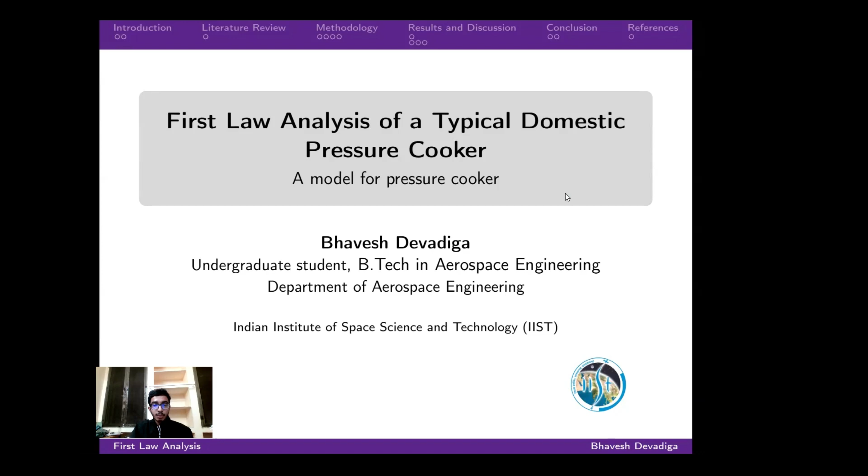The presentation follows this structure. I'll begin with a brief introduction, then move to the literature review, methodology, results and discussions, and finally the conclusion.

A pressure cooker is a closed vessel that traps steam. As the trapped steam increases pressure, it raises the boiling point of the water. This allows faster cooking, reduced energy consumption, and often retains nutrients. The system is ideal to demonstrate the energy of the first law thermodynamics as heat enters and leaves through a mass flow of steam.

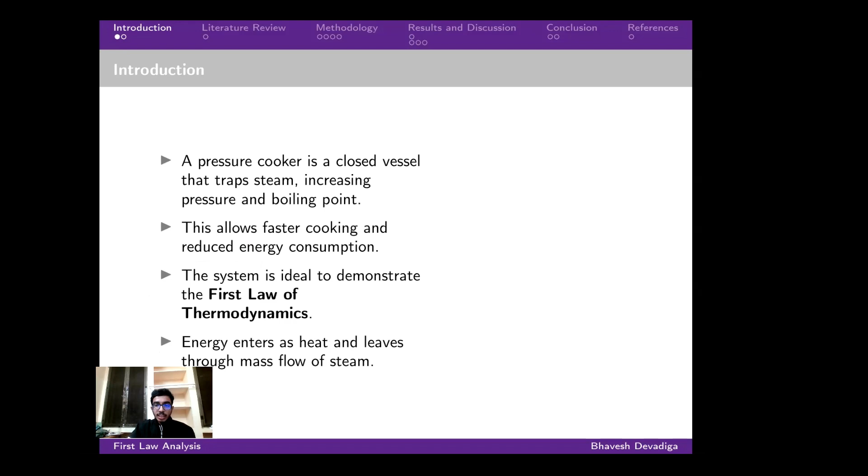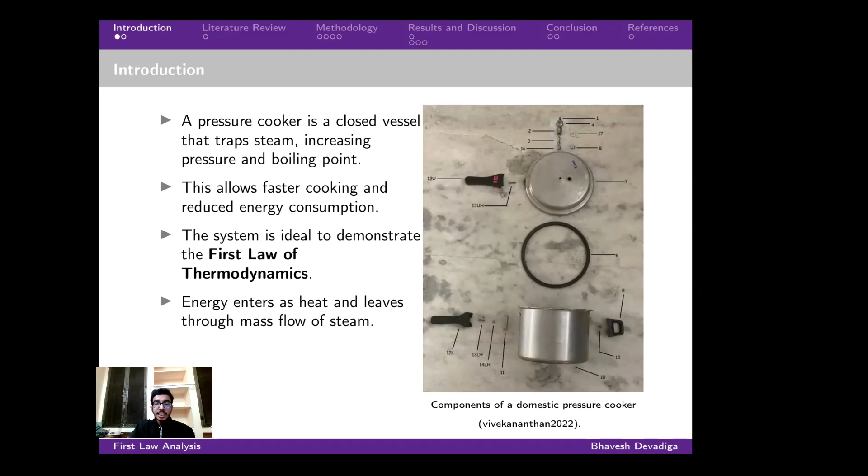The objective is to develop a simple thermodynamic model for the cooker and analyze its behavior using the first law. The study evaluates mass and energy balance, calculates the vented steam and change in internal energy, defines efficiency, and studies how parameters like time, volume, pressure, and temperature affect performance estimate.

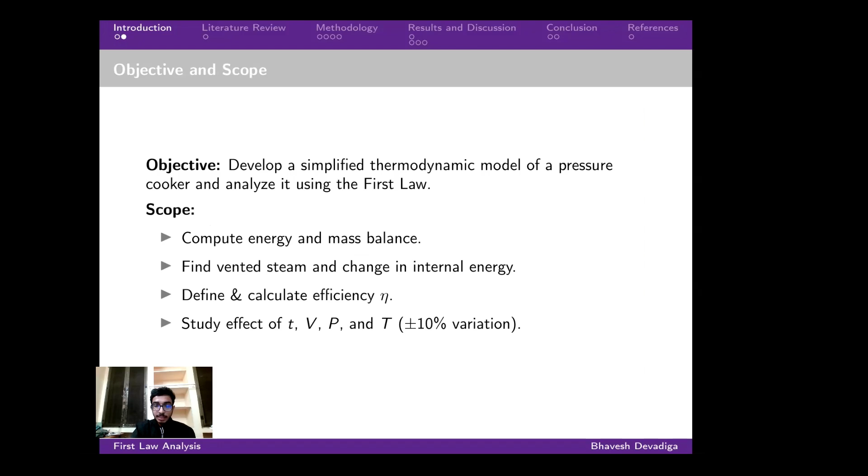Several studies have investigated various aspects of a pressure cooker, such as energy efficiency, heat and mass transfer, energy management, fluid flow, thermal loss, pressure variation, and temperature evolution.

Flick simulated fluid flow and heat transfer in a pressure cooker using three-dimensional computational fluid dynamics to predict gas and temperature evolution, including evaporation and condensation in the presence of non-condensable gases. Some phenomena that were difficult to characterize experimentally were observed in the simulation.

Building on this, Rocca-Poliméni developed a model of heat and mass transfer that predicted the evolution of pressure and gas composition at different temperatures. The study emphasized that condensation was a major part of heat transfer to food and recommended reducing heating power once the desired pressure is reached, as steam escaping instead of condensing on food is a thermal loss. Ayub experimentally tested the automatic non-steam release mechanism by decreasing the heating power as suggested by the previous work.

The study reported that the mechanism combined with ceramic insulation reduced thermal loss. Similarly, Ouedraogo insulated the pressure cooker with kapok wool and conducted a first law energy analysis to find thermal losses. The study showed that insulation reduced energy consumption during cooking.

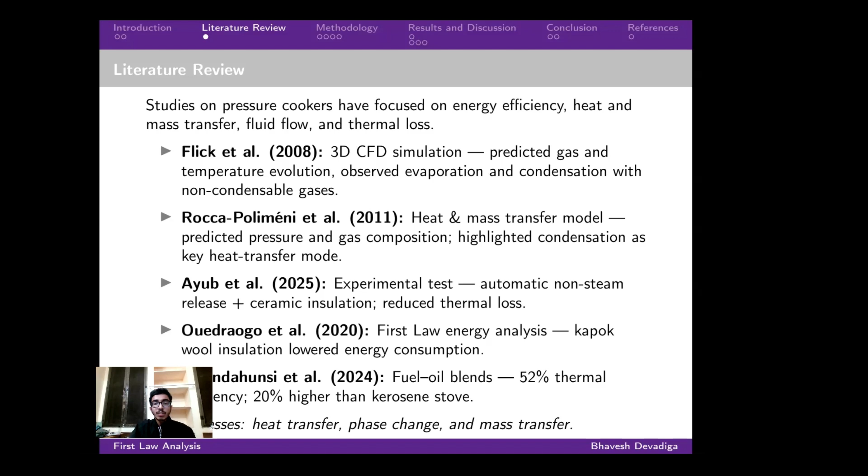These studies indicate that heat transfer, phase change, and mass transfer are key processes in a pressure cooker. The present work applies the first law of thermodynamics to a control volume.

The cooker's interior wall is treated as a control volume. Heat is supplied from an electric heater and some steam escapes through the vent valve. The system is assumed to be rigid, meaning no boundary work. Energy transfer occurs only through heat input and mass leaving as vapor.

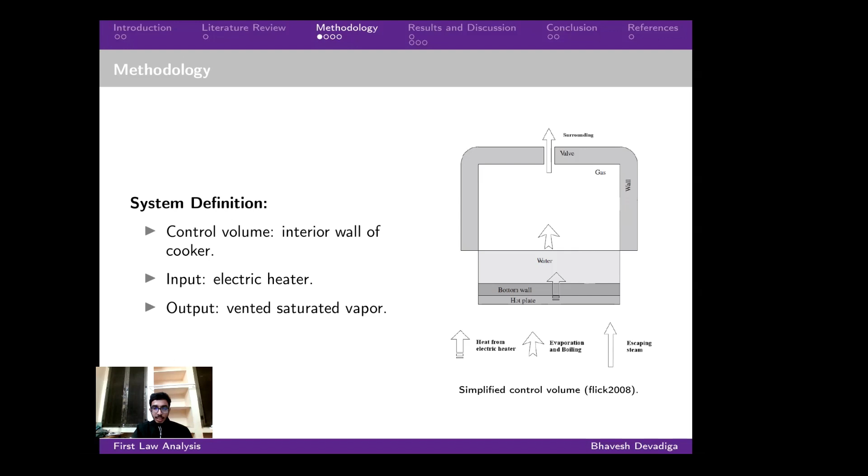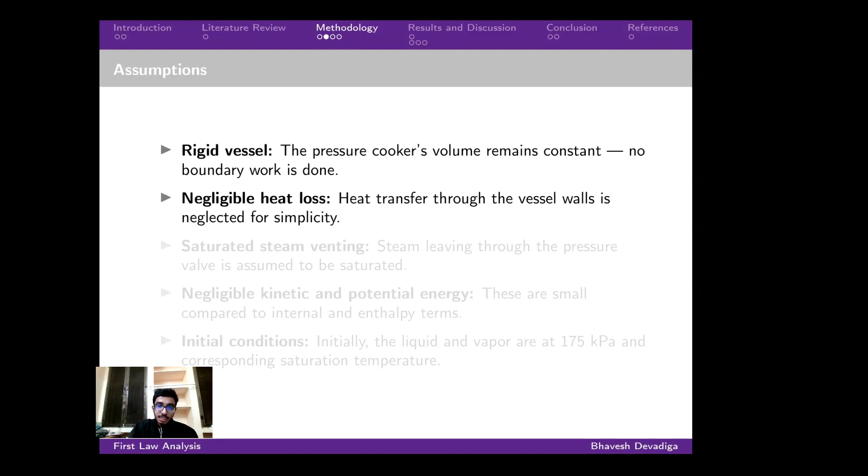The analysis is based on a few simplifying assumptions. The vessel is rigid, hence no boundary work. There is negligible heat loss to the vessel's wall for simplicity. Heat transfer to the vessel wall is neglected. Vented steam is saturated while exiting the vessel. Negligible kinetic and potential energy compared to enthalpy and internal energy.

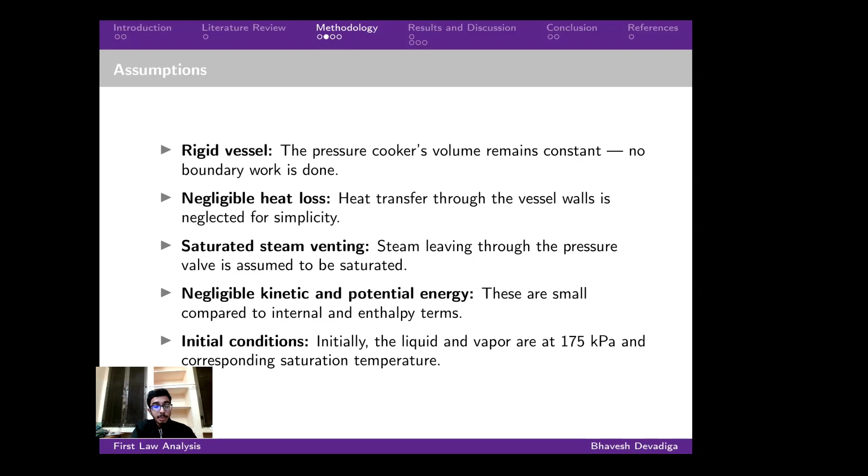Initially, the liquid and vapor are at 175 kilopascals and corresponding saturation temperature. Liquid and vapor occupy equal volume initially. At an operating pressure of 175 kilopascals, and 116 degrees Celsius, the cooker receives 500 watts of heat input.

Property values such as internal energy and enthalpy are taken from Cengel's book, Thermodynamics: An Engineering Approach. Experimentally, pressure, temperature, heat, and mass in the vessel can be measured using a dial gauge, thermocouple, wattmeter, and a weighing scale. The internal energy and enthalpy values can be figured out from the property table once we know the pressure, temperature, and quality.

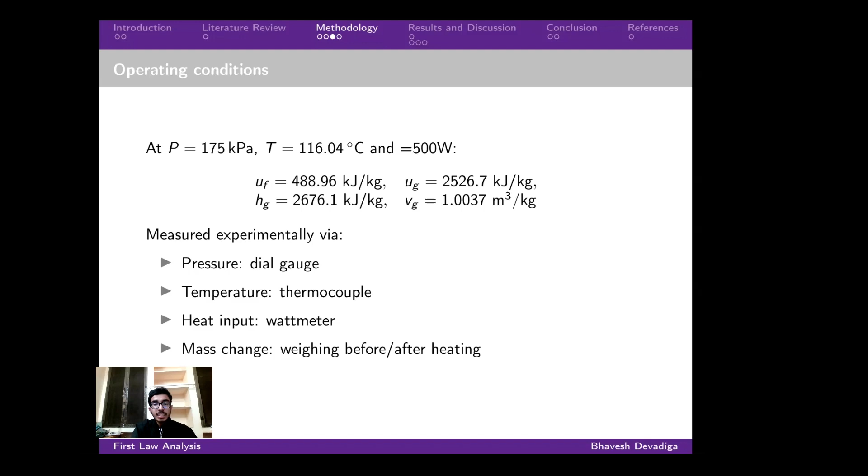The first law of thermodynamics for a control volume is applied as shown. Since there is no shaft work and negligible kinetic and potential energy changes, the equation simplifies to an energy balance between the heat added, the enthalpy of vented steam, and internal energy.

A volume constraint ensures the vessel remains rigid. Now we get the relation between mass and the quality of the mixture. This becomes a linear equation with two variables.

The efficiency is useful energy carried away by steam upon heat input. The efficiency is defined this way because previous studies have shown that most of the heat transfer to the food occurs through condensation. Hence, more steam means more condensation potential.

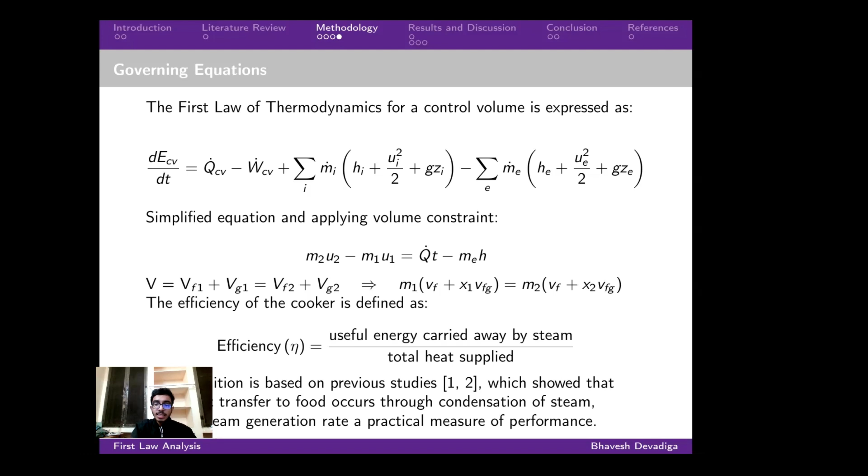Using the governing equations and volume constraints, expressions were obtained for the mixture quality X2, the mass vented ME, and the efficiency eta. As we can see, these relations allow us to calculate how steam quality and mass vary with time and how much heat contributes to vapor generation.

Mass exiting ME is directly proportional to time. One interesting observation is that the efficiency remains constant with time. We can also calculate mass exiting, quality, and efficiency using other parameters like initial volume, operating pressure, saturation temperature, while keeping other parameters constant, which we will see now.

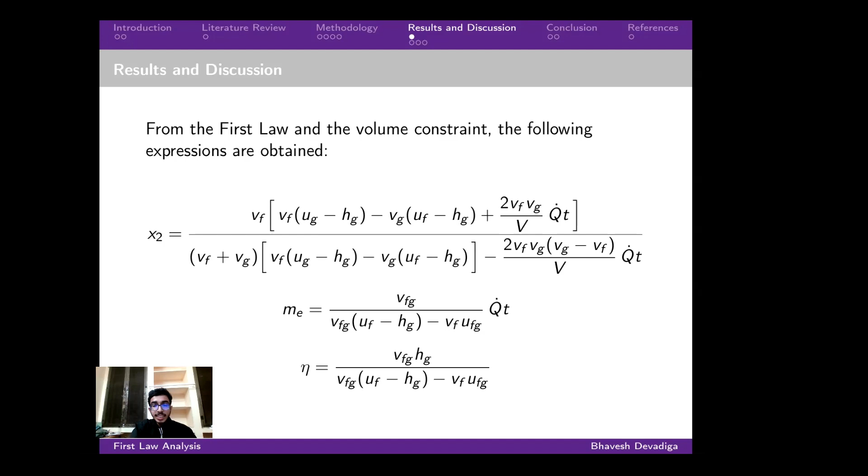The first plot shows that efficiency remains constant with time at about 0.94, meaning almost all of the supplied energy is used for vaporization. This is constant as the heat venting out due to mass as well as total heat input is proportional to time.

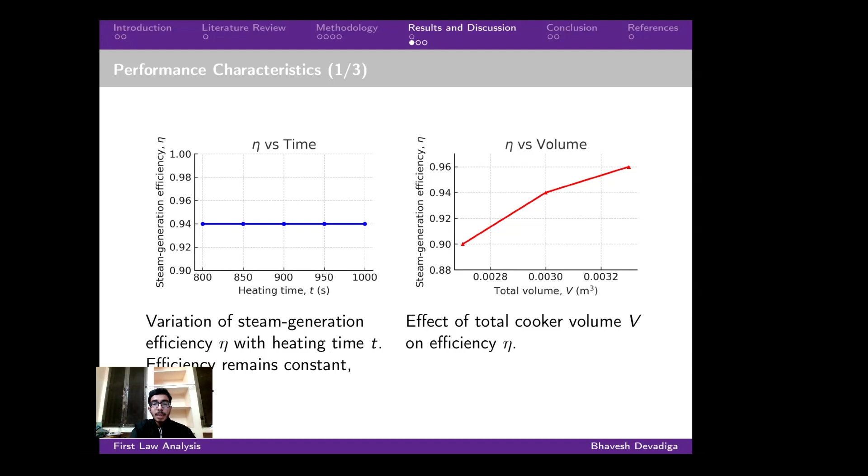The second plot shows that changing cooker volume has only a small effect on efficiency. The graph is plotted by keeping other parameters fixed, provided in the operating conditions. These plots show efficiency versus temperature and pressure. Even with plus minus 10% changes in the parameters, the efficiency varies very slightly.

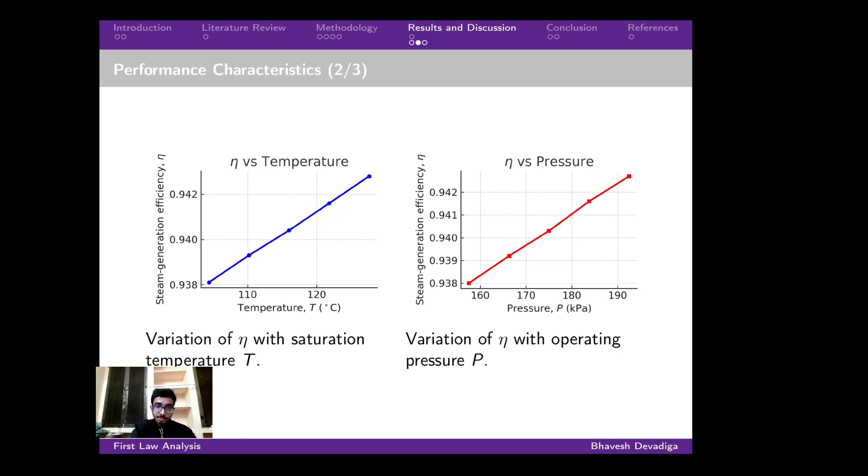Here we see that the mass loss increases linearly with time as heating continues. More steam is vented. Meanwhile, mixture quality X2 increases slowly, showing that the content remains mostly liquid with a small vapor fraction.

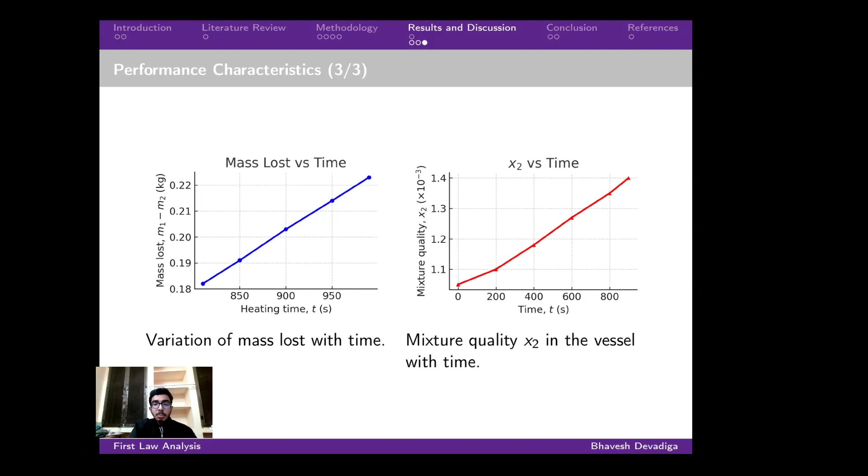To summarize, for a 3-liter pressure cooker at 175 kilopascals heated at 500 watts for 15 minutes, about 0.2 kg of water is converted to steam.

The internal energy per kg of the vessel increases slightly, while the total change in internal energy is negative as the steam escapes through the valve and energy is released.

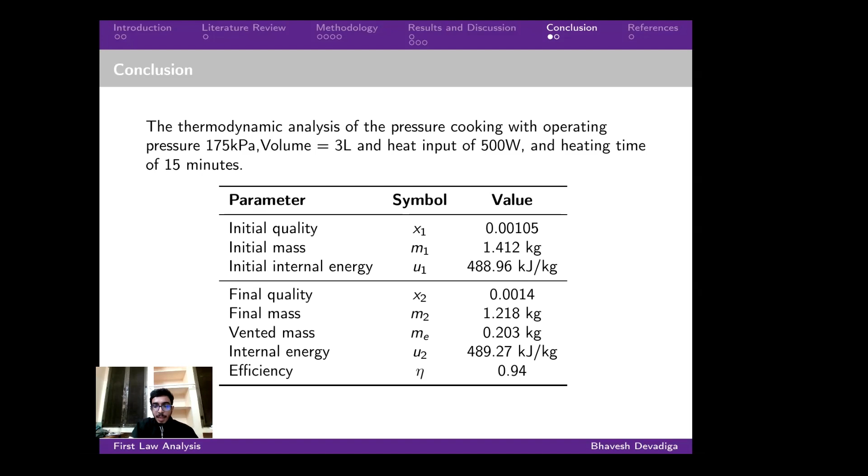The efficiency is approximately 94%, and a plus minus 10% variation in parameters like time, temperature, pressure causes negligible change to the performance. This study provides the first law estimate of the pressure cooker's performance.

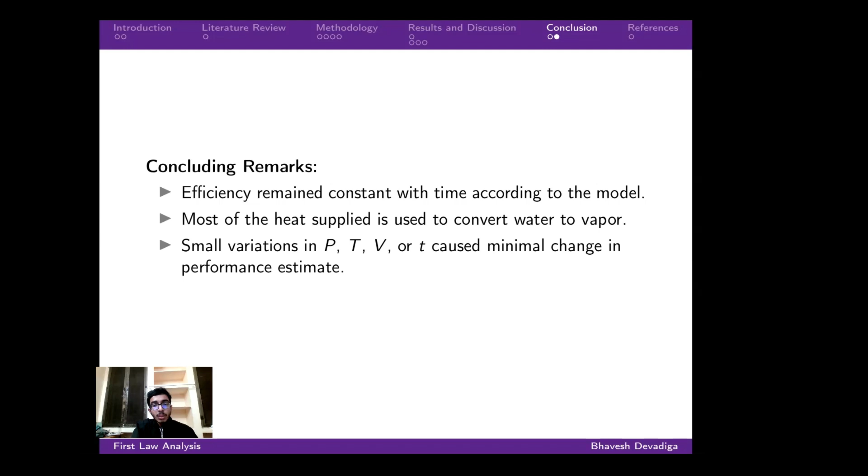However, it is solely based on the first law and relies on several simplifying assumptions, like neglecting heat loss to the walls. For more accurate prediction, a second law analysis is required in future studies.

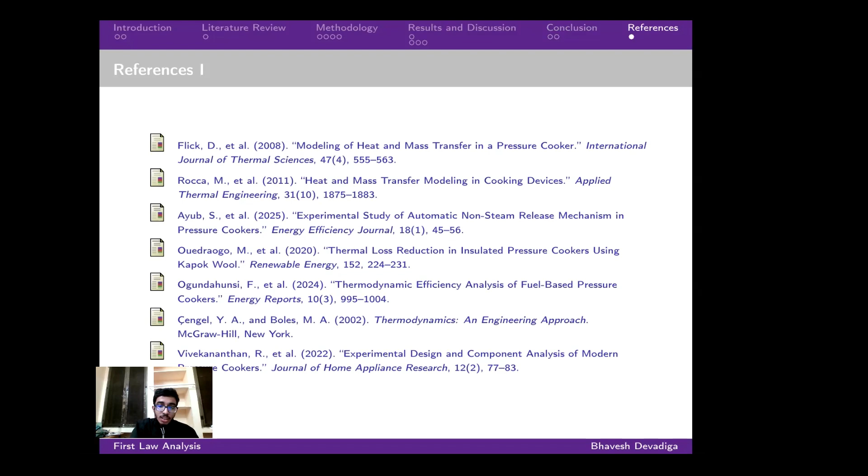The references include works by Flick, Rocca, Ayub, Ouedraogo, Ogundahunsi, Cengel, and Vivekananthan. Thank you.